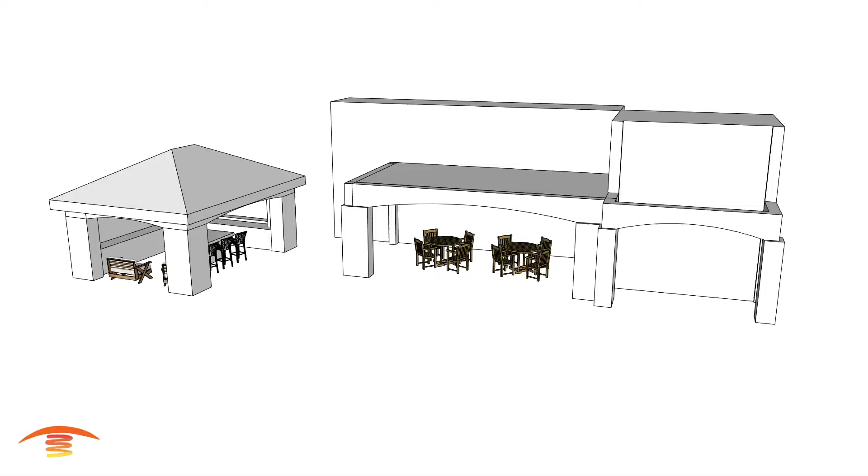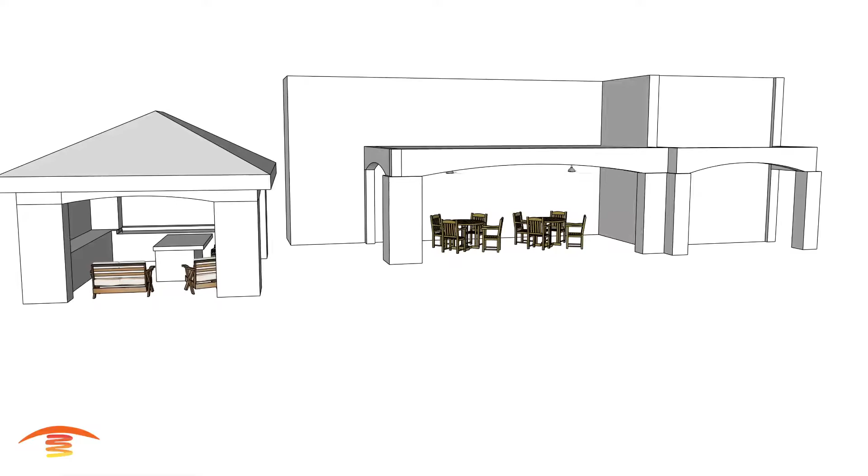Now let's get heating. All right, so here we have this residential application. So we actually got the floor plan as well as elevations, and so here's just the floor plan that I show here, and you can see that it pretty much matches up with the dimensions, overall dimensions. You can see here we have about 28 feet here, and I've gone a little bit further out because of the way that the floor plan is designed here on this particular plan.

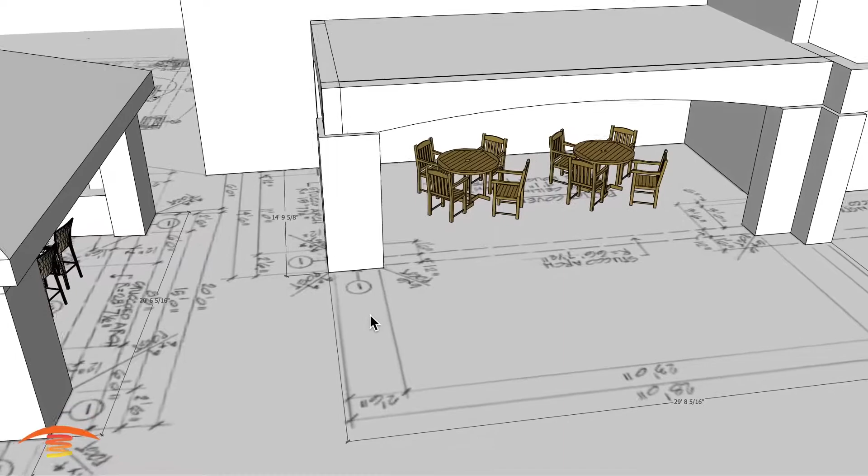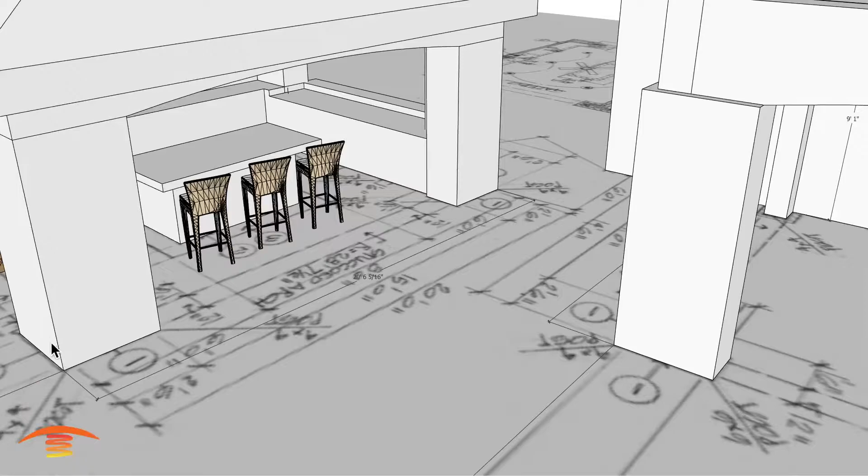In any case, so yeah, 28 feet by, I think it's 14.6 overall. Mine's a little bit larger, 14.9. And then we have this gazebo area here, and I have this set up at 20 feet 6 inches, where it shows 20 feet all the way to this edge here, but I think there's some covering, rock covering. That's why I got the 20 feet 6 inches here, and then over here 16.3, where it shows 16 feet. And again, the rocks come out a little bit further on this fascia here.

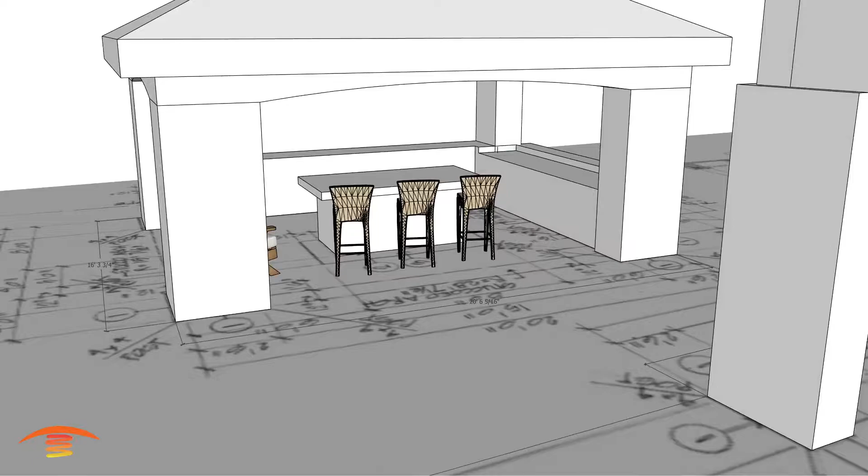All right, so we have some bar stool seating here. Let me just go ahead and turn off these dimensions. Oh, I didn't mention here, sorry about this, but 9 foot 1 inch to the ceiling height. So the ceiling height over here, and then the same over here as well, 9 foot 1 to the ceiling height here. Okay, turn that off, and I'm going to also turn off the floor plan. And we're just going to take a look at what we have here.

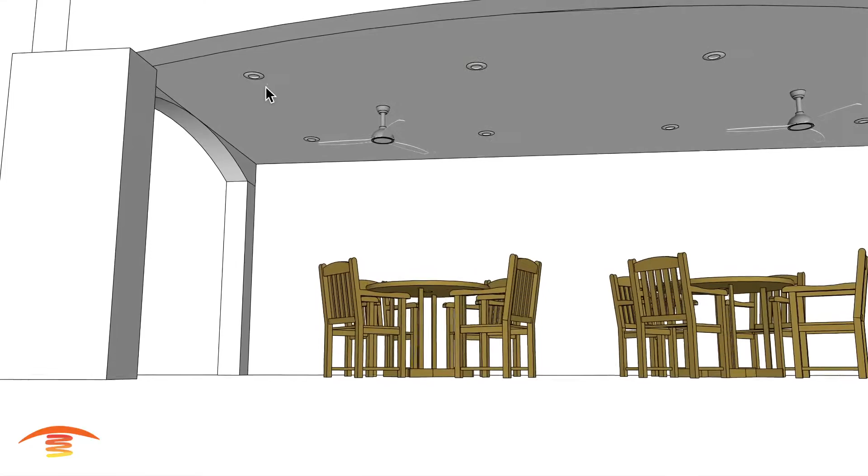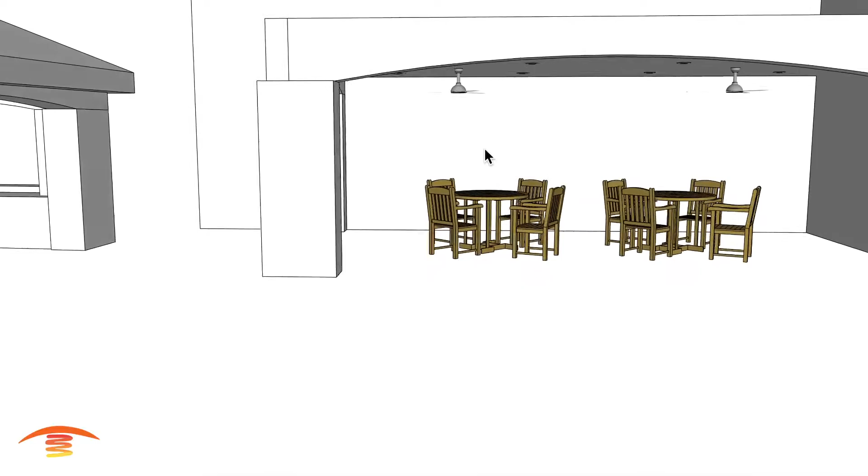We got a couple of fans going in here, as well as some recessed lighting up here. So we have 4. I have them at 8 foot center to center, and then centered on the fan itself. I basically just cut this into 4 sections, and then installed these here within those 4 sections there. And this, I believe, was just 3 sections with the lighting here.

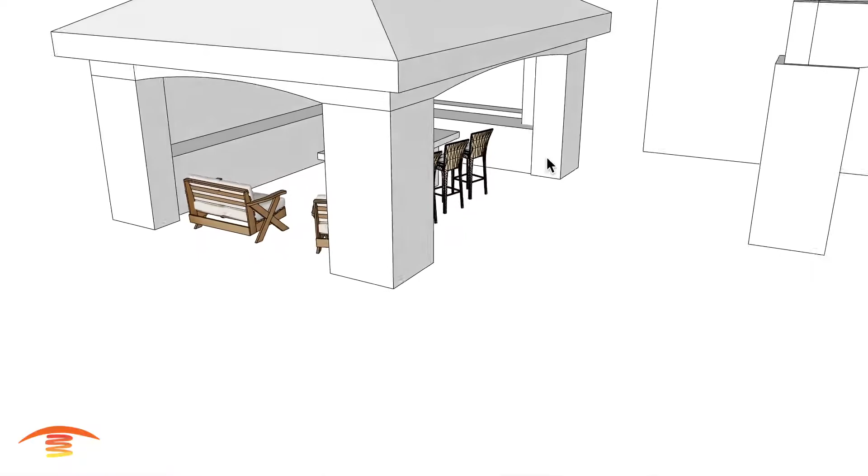See if I can move in here right. And so I cut this into 3s, and then put the one here. So I'm not quite sure where this actually matches up, but I think we'll be okay. There will be a fan here as well, and then the 6 lights up here. And we have bar stool seating here, some reclined area possibly here. There will be a TV set back here. I'm not quite sure if the counter is exactly right, but that's all right.

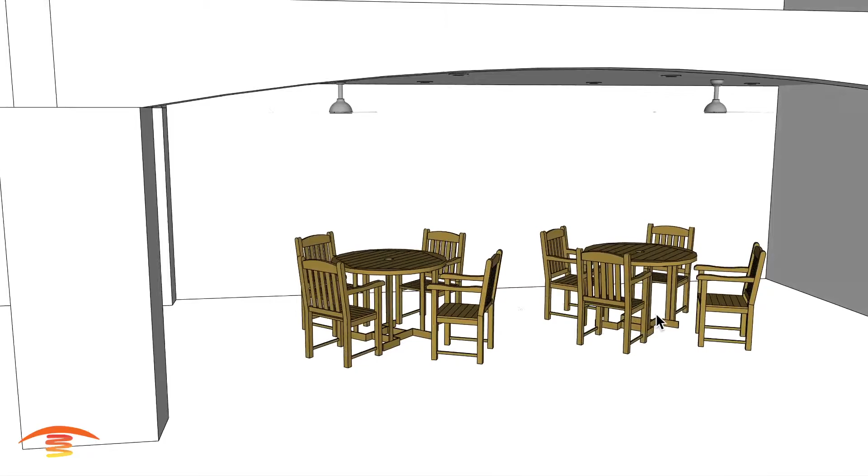Cooking area over here. So we're just going to concentrate our heating on just this area right here, and over here possibly. And then over here we have, I believe it's just going to be general dining. Now I just placed a couple of round tables in here, but it could be a square or rectangle table here that goes the full length. I'm not quite sure about that, but that's not important. You'll see how the footprint of heat will affect the seating area here with the 2 different options I have for this side here. And going back here, we're just going to go with the 1 option here.

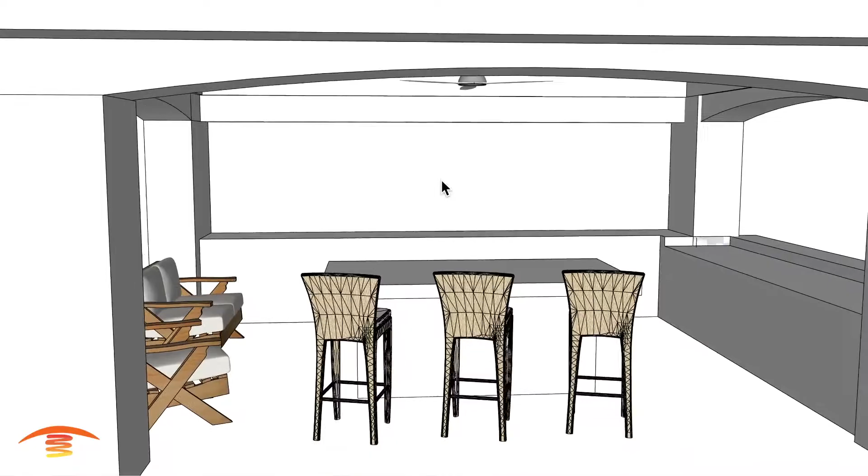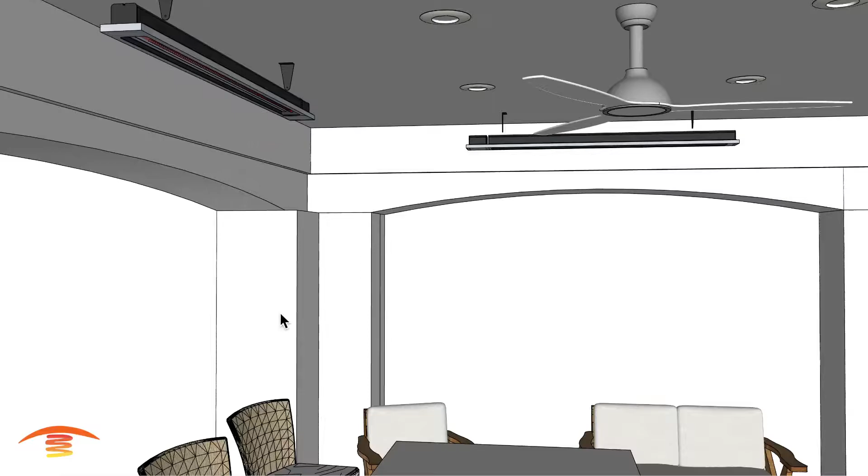Now, this particular client had mentioned that they have a very low amount of available amperage for this application. So these are slimline units. They both are the 4,000 watt unit. However, this one could be reduced to a 3,000 slimline. It's the exact same dimension. It puts out the same footprint of heat. The only difference is that it has a little bit less of an output of heat, and that's fine with this bar stool seating. So I'm happy with the 3,000 watt or 4,000 watt here.

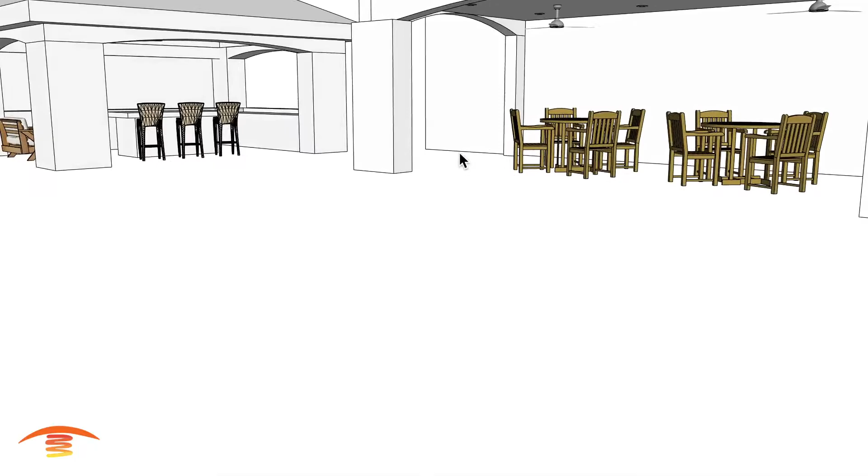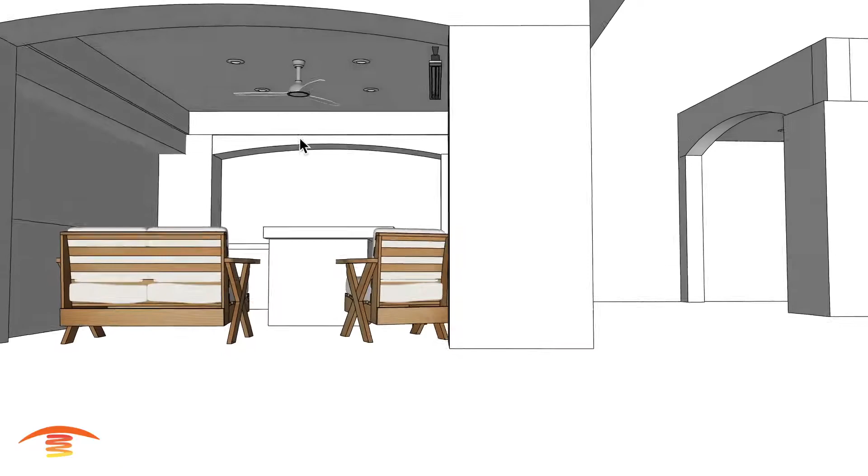Now I should also mention that they live on a hillside, so there's a large wind tunnel that comes up this hillside and meets the property right here. And so it's a very windy area most of the time, especially during the winter seasons. So something to consider. In any case, let's go back here. We got 3,000 watt over here, 4,000 watt here, or both 4,000 watts, and we are meeting the clearances to combustibles as far as the edge here.

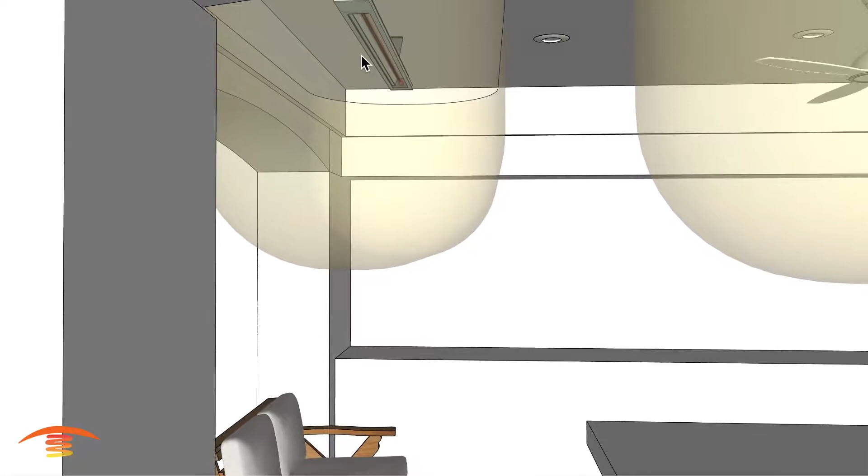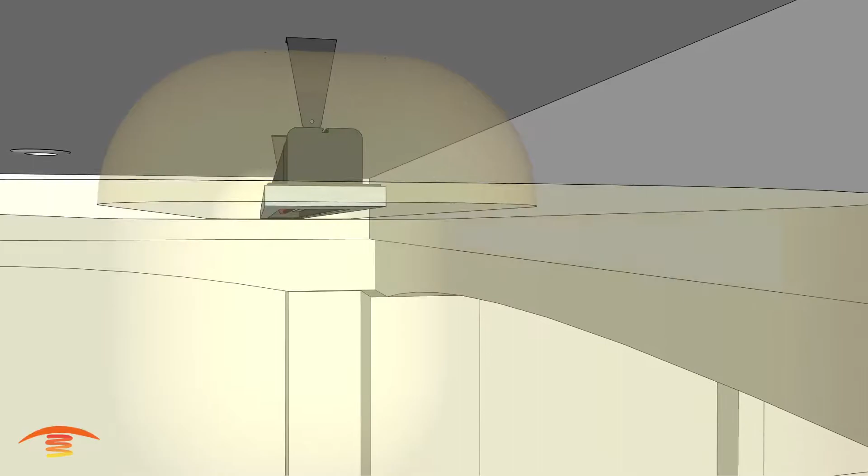I got 18 inches. I have the heater pointed straight down to the ground. You can angle this one slightly, maybe 5 degrees in, 10 degrees in, that would be fine. But I would have it 18 inches away from this edge over here, and the same with this over here. The fan blade will not hit the actual clearance area, so that shouldn't be an issue over here as well, but 18 inches. And then of course just using the OEM bracket to come off the ceiling so that we have our 6 inch clearance above the heater like that. Okay, let me go ahead and turn that off and turn off that clearance, and let's look at the footprint of heat over here.

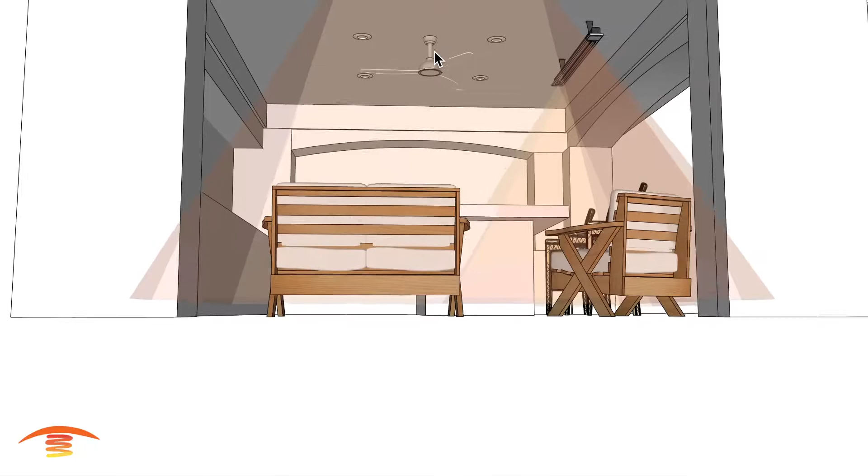Footprint of heat, you can see that we're covering the area fairly well. I just have it centered in the room, and I believe the countertop here is centered as well. And then this one here is going to be centered within the span over here. I just have it centered with the fan itself and the lighting. And you can see that we got a good footprint of heat on both of these spaces.

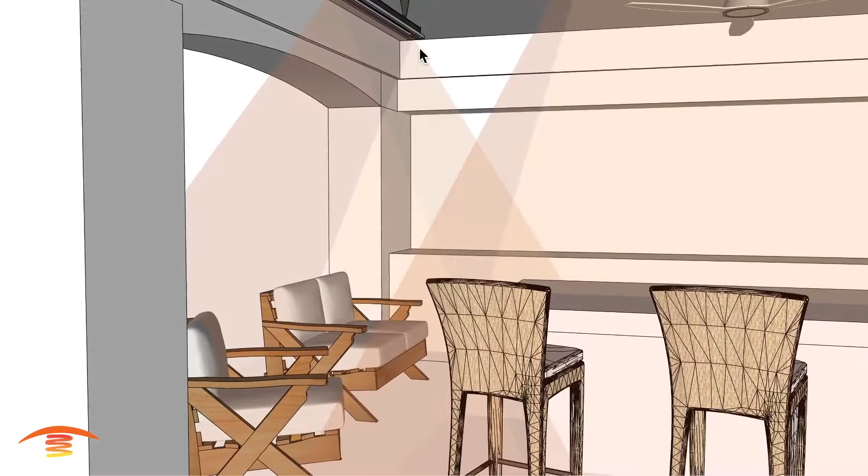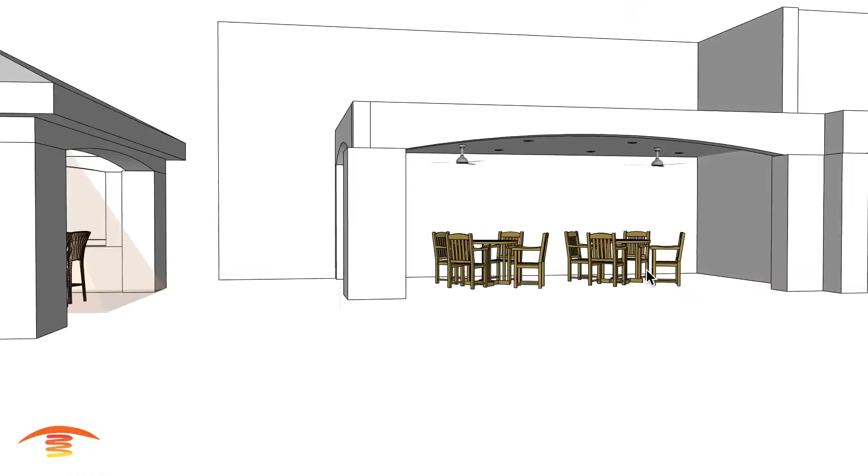Now, personally, I would like to have a 6,000 watt heater at the 9-foot 1-inch installation height. However, again, we have a limitation on the power, so this is the best I can come up with in this scenario. So that is that system there, and we're going to come over here and take a look at this. So there's going to be two different options here.

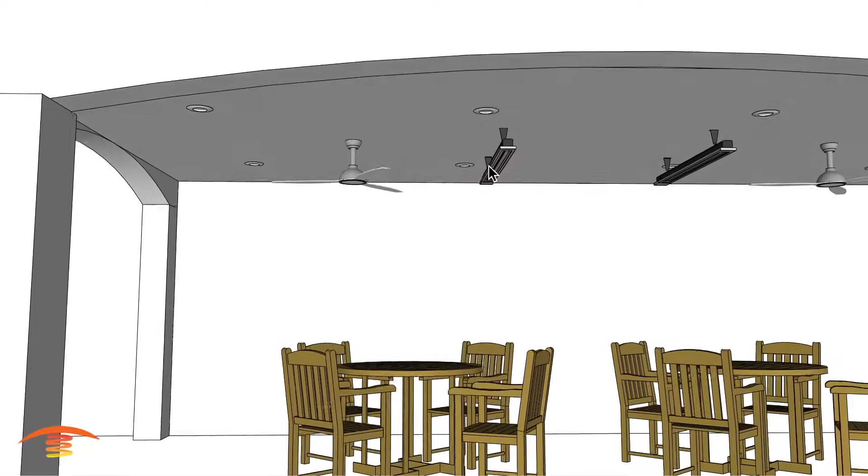Number one option I'm going to use, let's see if I can turn all this on here. So this is number one option, which I do not like unless we can actually place more units over here. And even that, I think we're not going to be heating the area properly. You'll see here with the footprint of heat in a second, but we have this at 8-foot center to center, and they're off center with the lights here.

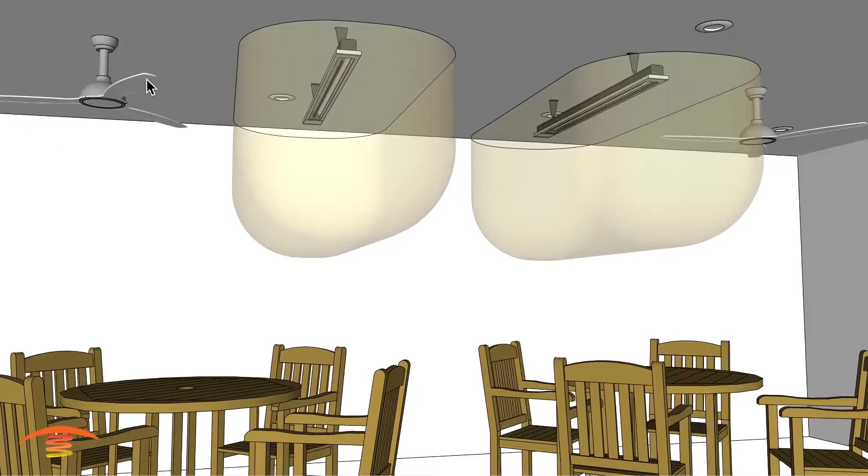I don't like that as well, but I do have to keep a minimum clearance from the fan blade. Again, 18 inches. You can see that we're meeting that without an issue, and this blade here will spin around obviously and get into that location as well. So let me go ahead and turn that off and turn on, and this is, again, the same type of application, ceiling mount with the OEM brackets meeting your 6 inches of clearance above. And let's go ahead and look at the footprint of heat.

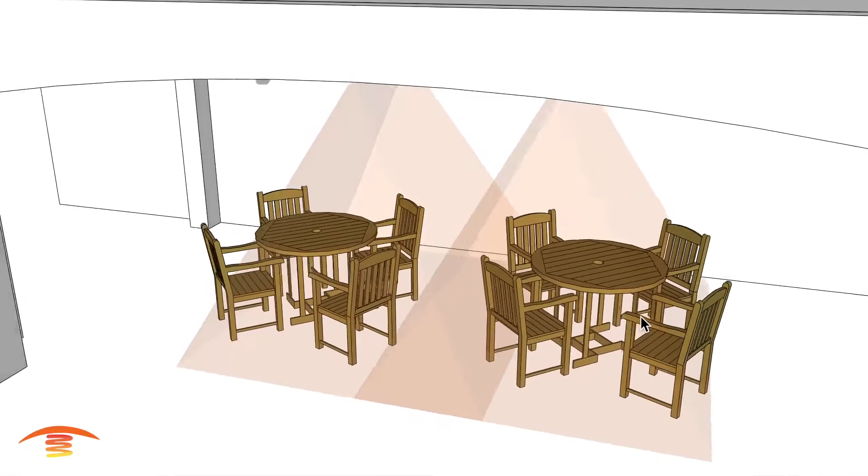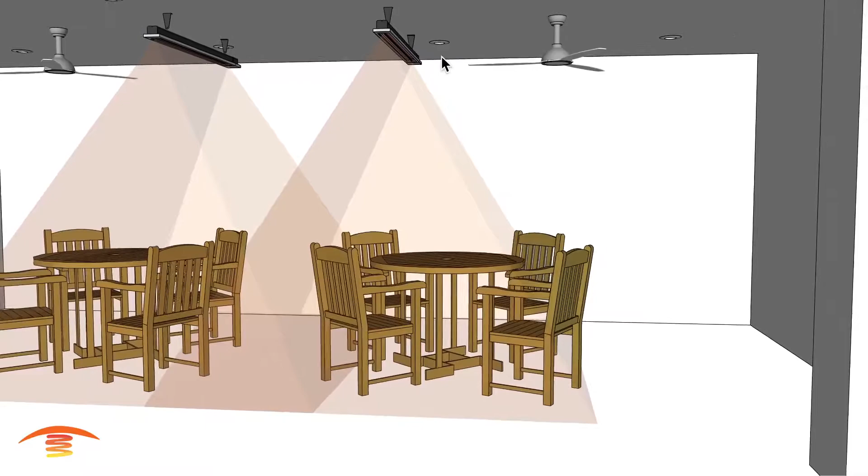So footprint of heat, you can see that we're not really covering the whole area nicely, and if you drew a line straight down from the fan here, you can see that we're just barely getting over that edge here. So if I place another one of these heaters outside over here somewhere, which would have to be 18 inches away from the fan blade, you would probably get something that is not acceptable.

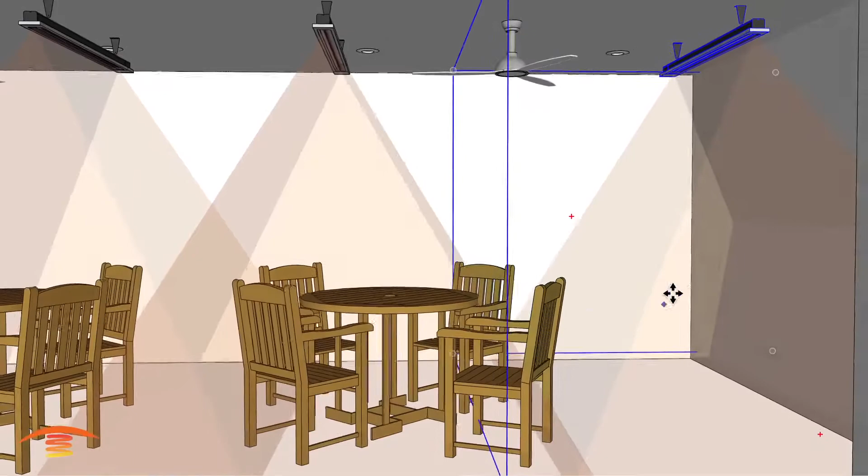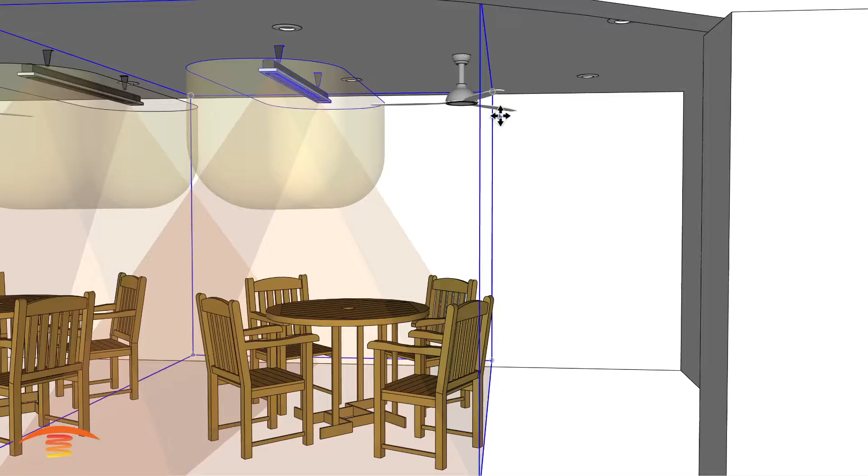Let's see if I can go ahead and move that just for an example here. We'll go ahead and do something like maybe 9 feet here, and let's go 8.5. See how that looks there. I'm still kind of close to this wall edge here, so let's go ahead and put that. Let me just go back here a second, and I'm going to put the clearance on here so we can take a look at that, and we'll move it here. Whoops. Try that one more time. Here we go. So we'll move that.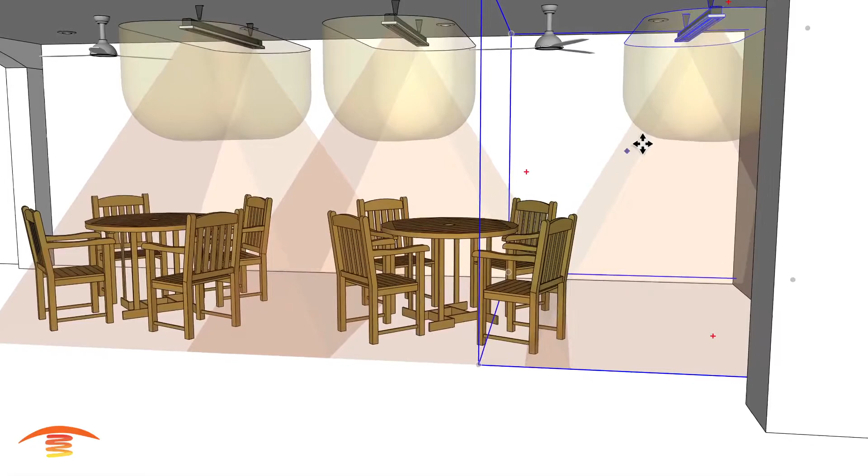Let's just go 7.5 feet to see what that gets us. So we're still too close to that fan blade. So yeah, it's going to have to be somewhere in that 8-foot range. We're okay with the wall there, but you can see though the footprint of heat is not very good. And yeah, you could probably angle this unit inwards a little bit in order to achieve some more warmth right here, and then place another unit over here. But in order to heat up this whole space, you really need more than just 2 units.

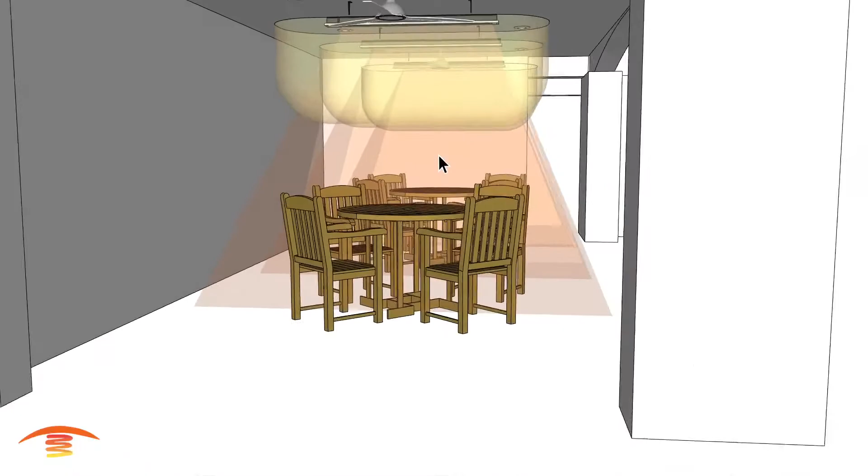So that would be one option, going with 4 across, 2 across in this fashion, and they're basically just centered within the span here. And I'm sorry that I didn't do all the artistic rendering for the structure itself. I usually would try to do that, but we're running out of time around here. So in any case, hopefully this will help here.

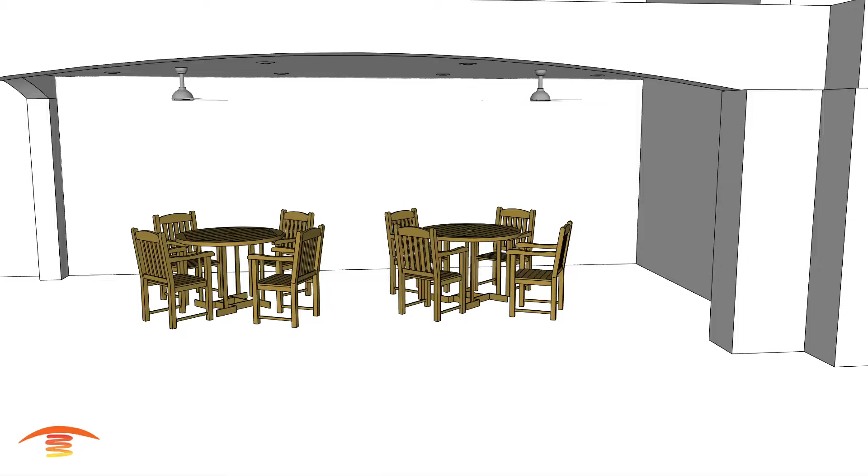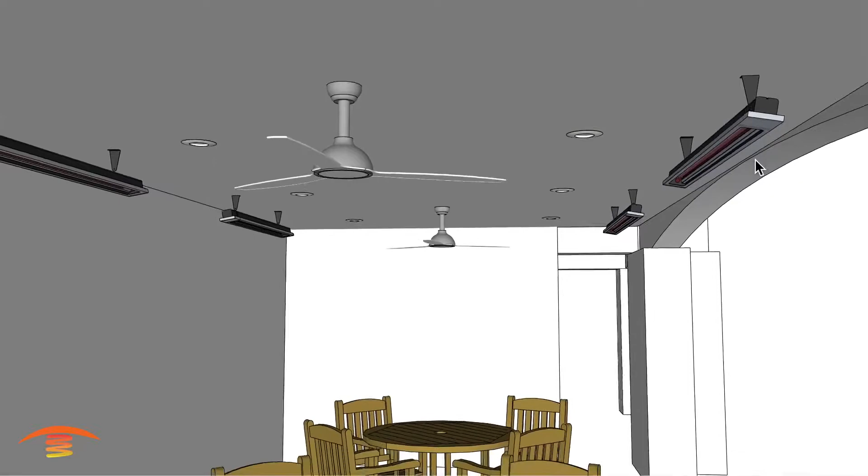All right, so let me turn that off and turn this off, and we're going to go into the second option for this application, and that's again I think I have it at 9-foot center to center, 18 inches off of the inner edge over here. I have them at I believe it's a 10-degree angle inwards into the center of the patio, and you can see here we have all 4 units. Let's go ahead and look at the footprint of heat.

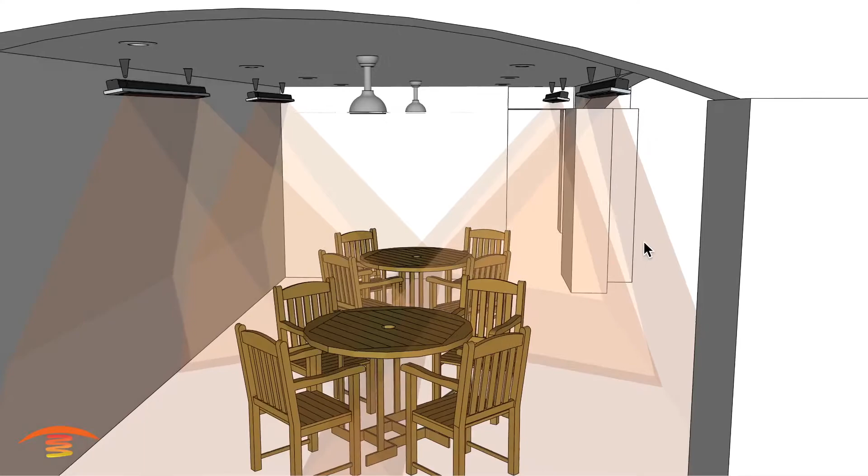This footprint of heat will be a lot better than the other option, so I think this is something that we'd really want to consider. But we have 4 units out here. Now the 4 units, each one are 16.7 amps on a 4,000 watt slimline Infratech heater, and the preferred one again would be the CD 6024 for this mounting height, and also a lot of wind coming up through this property. So this is just a secondary option, but definitely I would think 4 units would make it more comfortable

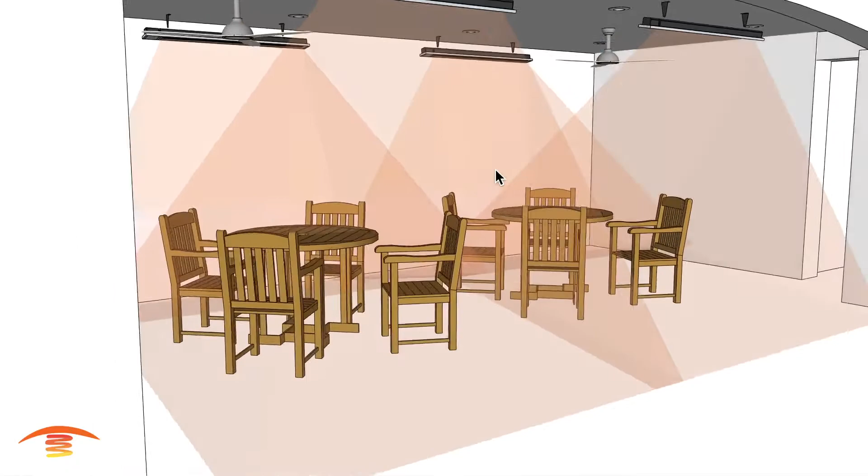than just 2. And I really hate to even mention using 2, honestly. So I would look at maybe upgrading the panel, or considering something else for this application if you couldn't go to at least 4 units here. All right. In any case, I hope this has helped.